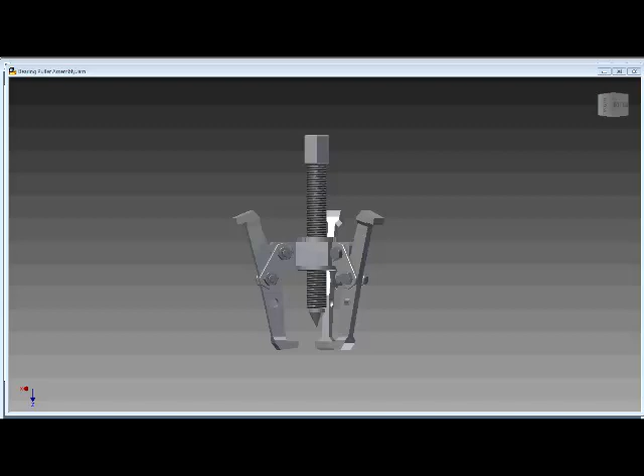Right, here's the three-legged puller. She goes up and down, constraints, comes up, just cancel that out. Pin, the bolt screws in and out, pops it off. And the way this works is it all locks in around a threaded collar.

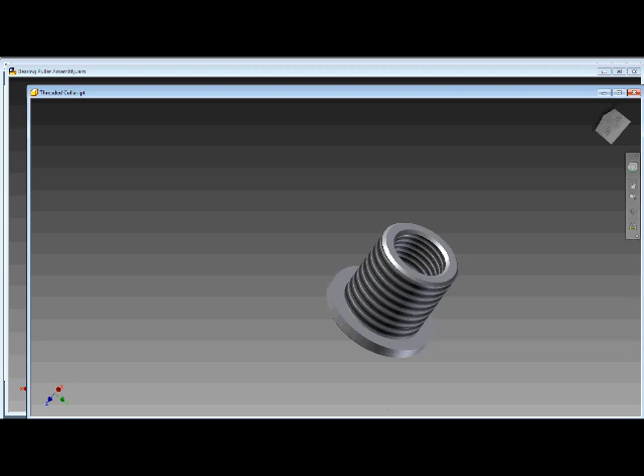Here's your threaded collar. Here's your lock nut. That screws the yokes for both the two-legged. Here's where it explodes out. Two-legged view. Alright, so the pin comes out. That goes up and down, and there's the washer. So the washer goes on top.

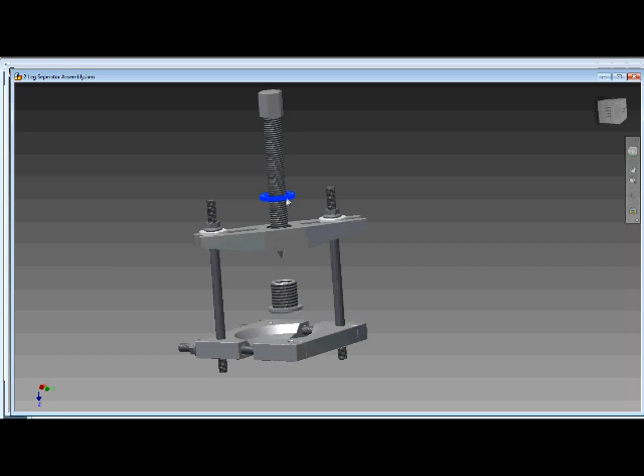This actually screws in. If we look in here, there's a thread in here. So the threaded collar screws up in there. Lock nut screws down, that locks it in for the two opposing thread lock. And the pin can go through and work as a puller. So this is a two-legged with the bearing separator.

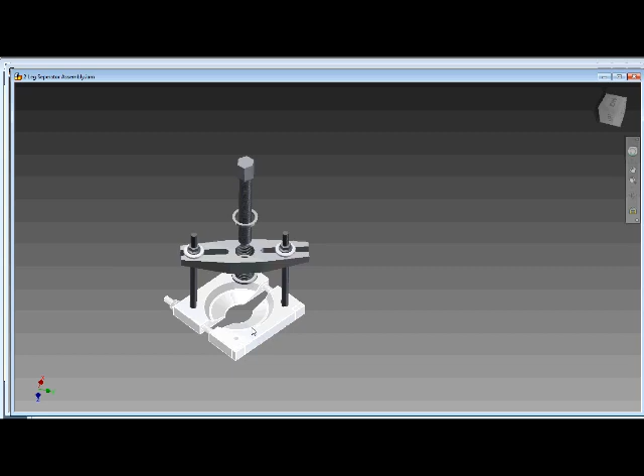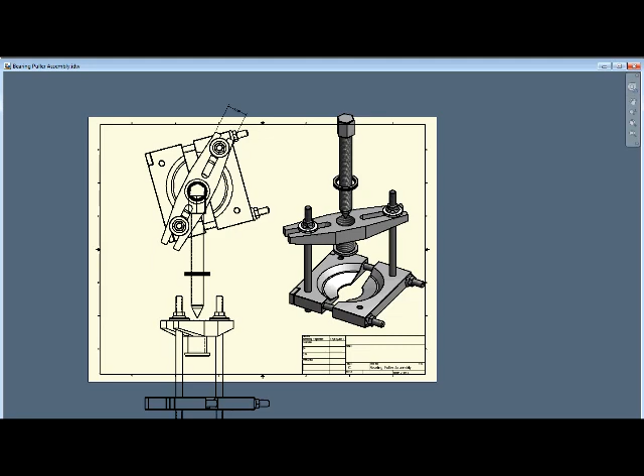That way when they make the two-legged yoke, they're using I assume an end mill, maybe a slab, to do this major machining. Then they've got to bore out the center. Maybe not bore, they mightn't have a head big enough to bore it out. Might need to drill and ream. They'll definitely need to bore this bit out, so there's a bit of boring in there.

That starts its life as a solid block, which they then turn in a 4-jaw chuck. They've got to make these little bolts here up as well. Spacers, the three-legged yoke, the links, and the legs, as well as the collar. So I reckon that's a pretty good assessment for those 3 units of study. Nice, challenging project. I'll see how it goes.